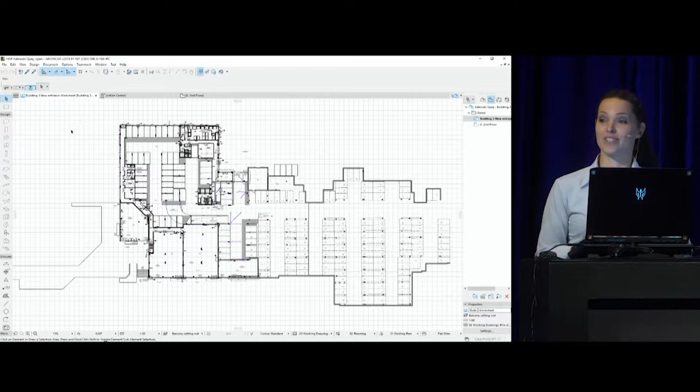This is one thing when we explicitly know what project to open, but there is another case when we're uncertain about that. Let's see an example of what happens if we don't know exactly what project to open, and start ARCHICAD again to see how startup works from now on.

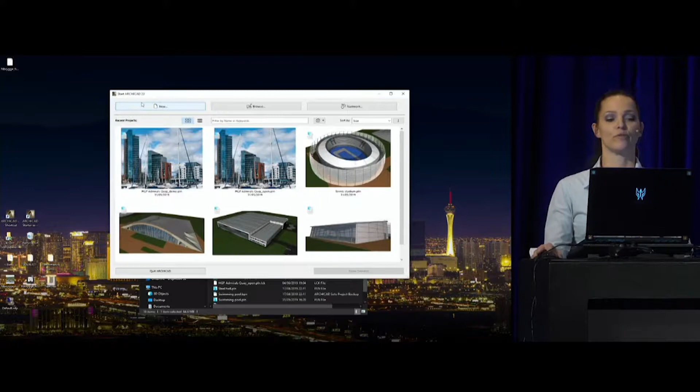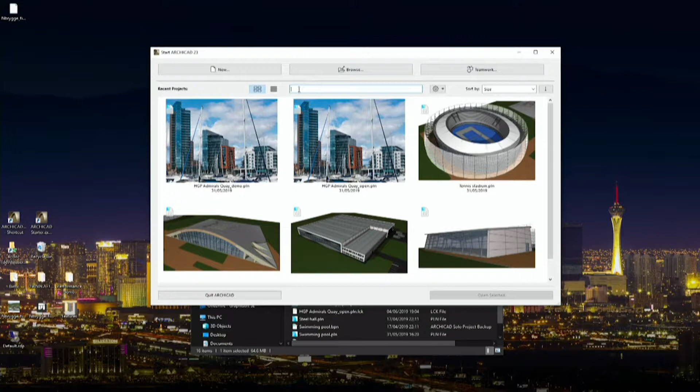In ARCHICAD 23, we've got a brand new startup dialog box with a lot of additional features. If we don't know the name exactly, we can use the search field to type something, and this search field searches not only in the file names but also in the project info. If you are more visual kind, you can also use the preview pictures. These preview pictures are not just static images, but play a slideshow about the open tab pages of your project. So, another easy way to choose the project you're going to continue with.

The good news is that while we're spending our time here picking the project, in the background, the computer continues to load the different parts of the software into memory. So by the time we click on anything here, it will be up and running to open our project.

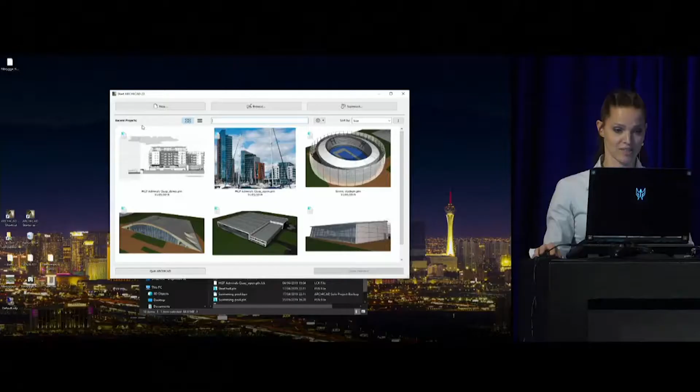We also have a nice list view, and the last case I'd like to emphasize here is what if I'd like to open multiple projects in one run. From now on, it is also possible. You can have multi-selection, and if you click the Open button, it will start as many ARCHICAD instances as necessary to open all projects selected here.

Okay, so let's quit this for now and return to our real project. That is a nice residential building from HGP Architects, built in Southampton, UK. This is an award-winning residential tower project. Special thanks to the company for letting us use it as a demonstration.

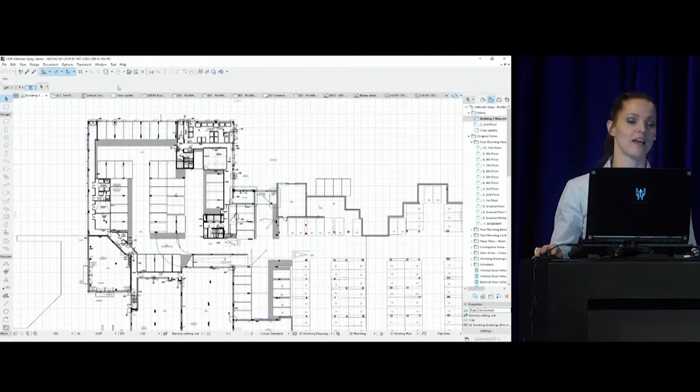So this is my project, but before we start actually designing, we have to think about where all these previous questions go. For those people who are really in charge of sorting out the questions, like BIM managers or project coordinators, we designed a center interface that is called the Action Center. This interface collects all diagnostic data from now on, and these people can find those.

There is direct access to those dialog boxes where actually the problems can be solved. And it is also color-coded, so once a problem is solved, the color will instantly change in the Action Center view.

All right, so the second challenge to work effectively is finding the right view we like to develop our model. In case of such a complex project, it sometimes is a challenge because we might have many different views open and it is hard to distinguish which is which. For example, here I have many views open, but because the beginning of the view name is the same, I have no idea what is what.

We could go with the traditional try-and-error way and just start opening it, but it would require a lot of time, and we all know time is money. So instead, from ARCHICAD 23, what you can do is simply hover your cursor over the preview to show its content. Whichever view I like to go, all I need to do is hover my cursor over the view, and as you can see, it immediately shows you the picture of how it looked before I left this page.

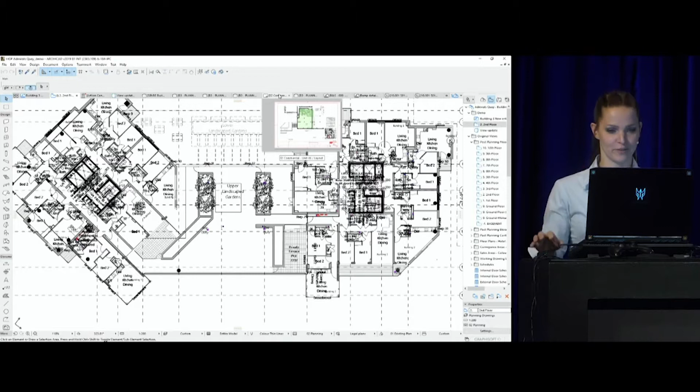Finally, great. So let's talk about view updates now, because this is also a quite challenging thing. We model something, so how long have we got to wait until all the relevant views get updated? Let's do a little experiment.

So we've got this floor plan here, and we also have a 3D view. Now I'm going to do some modeling. Of course, just for the sake of the demo, I'm going to place some walls on top of this roof here.

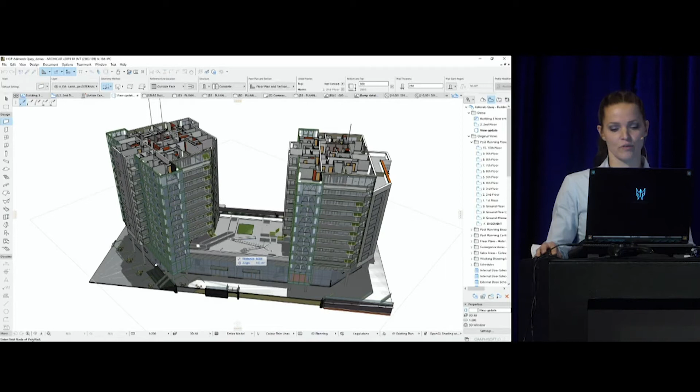So what is going to happen if I switch back to the floor plan? Is it going to redraw the entire thing just for the sake of these three walls? Let's try. Of course not. The view is there instantly, and in a fraction of a second, my new walls appear.

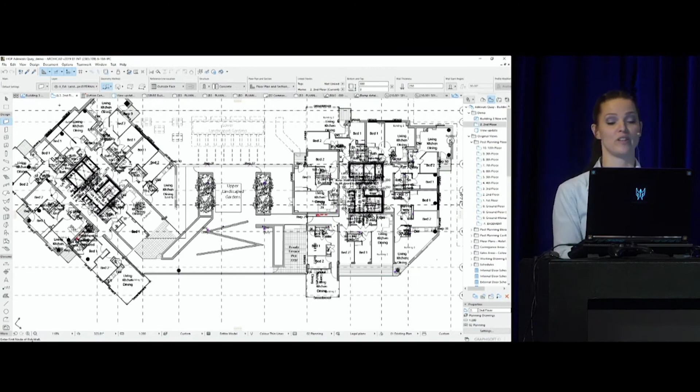So in this demo, we could just show you these examples of how we improve the performance of ARCHICAD 23, but there are many other areas in the software where you can meet these enhancements. So I wish you to try it with your own workflow and find your favorites.